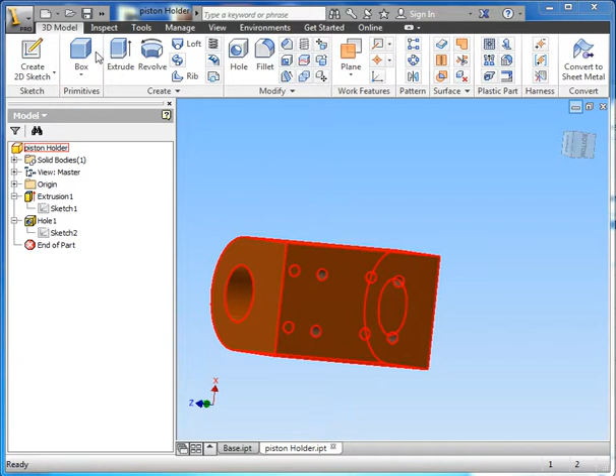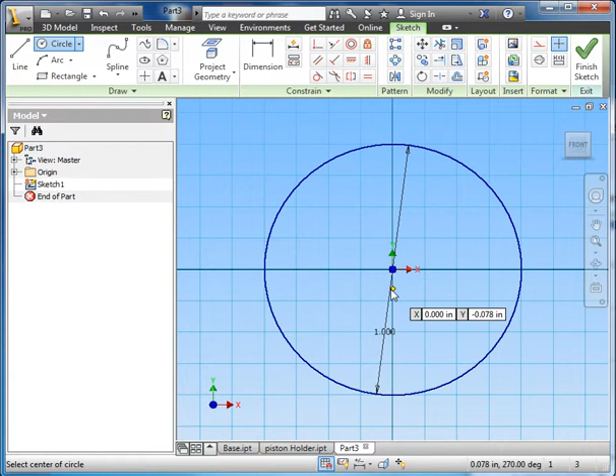Okay, in part 3 of this tutorial we're going to be making the anvil and the piston. So make sure your last file is saved, and we're going to go new, and again standard inch IPT. Open that up, and create new sketch, there we go, and let's create it on the front plane. Okay, so I'm going to use the circle tool, I'm going to draw a 1 inch circle, so I move this out, we're going to use dynamic input, so 1, enter, and there's our pre-dimensioned 1 inch circle.

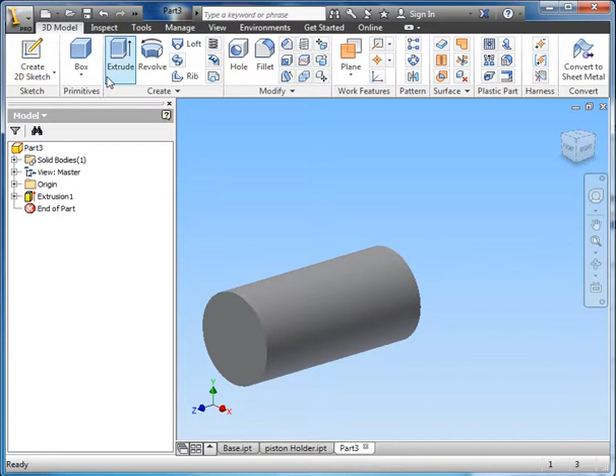Finish sketch, and now we're going to extrude that. Now for the anvil we can adjust this later, but let's extrude it a distance of 2 inches, and okay. So there's the start of our anvil. Now we need a wider piece on the back so it has a bit of a stop when it's going into the holder. So let's go create 2D sketch again on that face, another circle, and this time let's make this 1.5. There we go. So we've got a 1.5 circle. Finish sketch.

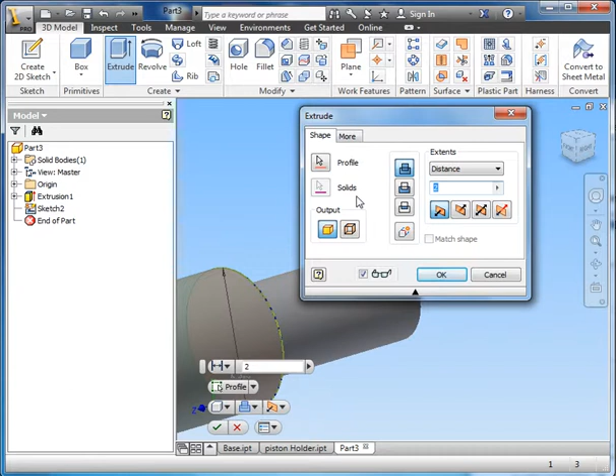We're going to extrude again. Select both profiles. And this time it doesn't need to be any more than a 1/4 inch. So there's our basic anvil. We can add a little bit of flair to that just to make it look a little nicer. So put a chamfer on there. And apply. Okay, so there we go. Let's change the color of this part so we know when we're doing our assembly that it's a separate part.

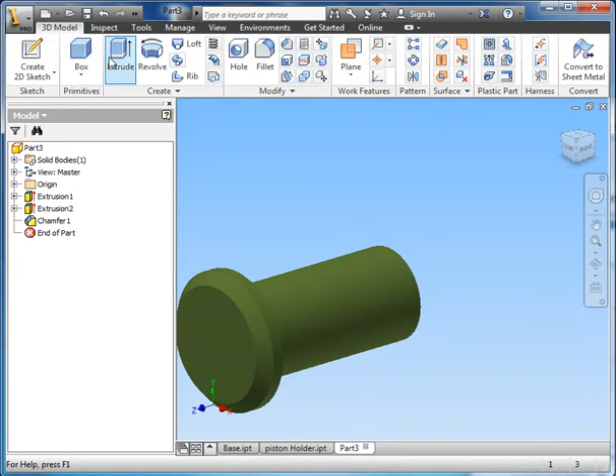And let's see, olive green today, and we're going to save that. So this part is going to be the anvil. There we go, save. So there's the anvil. We can close this, we don't need it anymore. Close that too, and that. Okay, so let's do another new part.

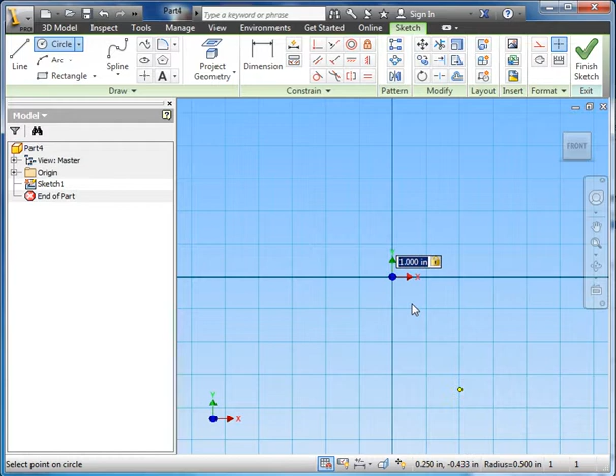Standard inch IPT, double click on that, create new sketch, we're going to create it on that plane, and use our circle tool, another 1 inch circle, dynamic input there, finish sketch, and we're going to extrude this circle. So we go extrude, click on the circle, and this one let's extrude to 5.5 inches. We may need to change this later, but for now that's okay. So there we go. Now we did draw it so the origins were in the middle, so let's click origin.

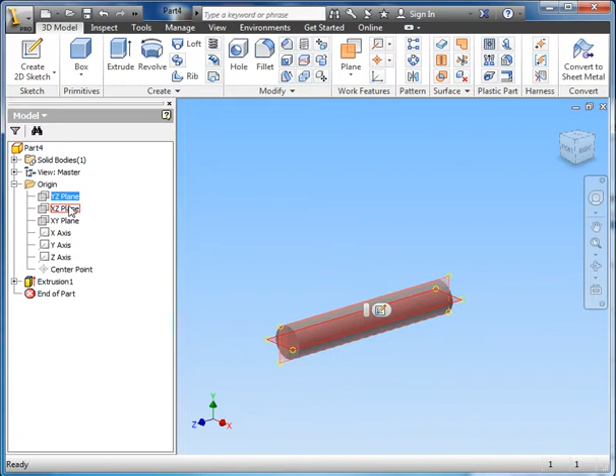And we can pick that one or that one or that one. Let's go there. I'm going to right click and turn on my visibility. So now I can see that middle plane. I'm going to create a new plane for drawing a little cutout on the back here. So plane, and I can click on that and drag it out. I want 1/4 inch. So I click yep. And you can see now I've got 2 planes there. Create 2D sketch on that new plane.

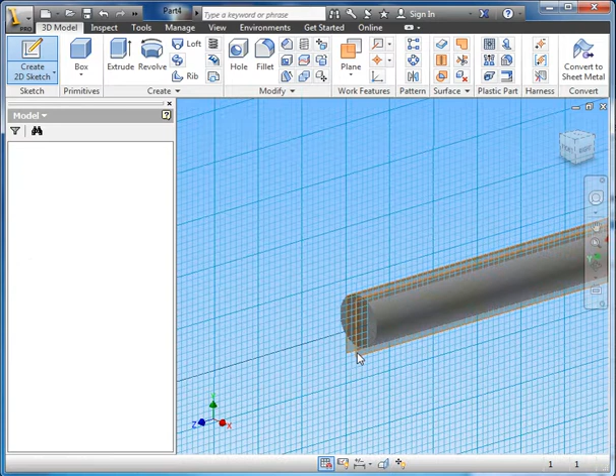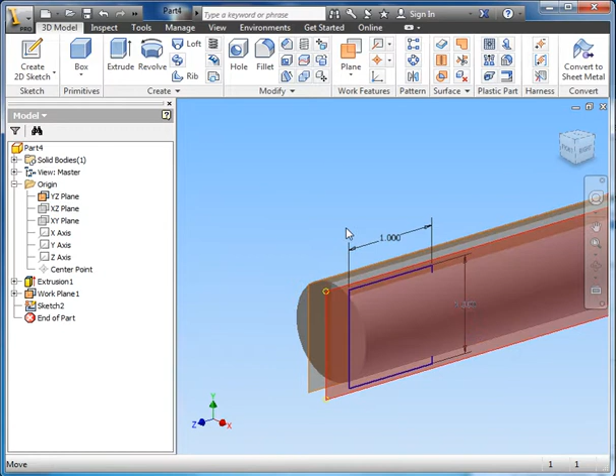We can project the geometry from the end so we know how big to draw. And we're just going to draw in a rectangle. Now this rectangle should go down about 1 inch. So we'll go 1, tab, 1 using that dynamic input, and finish sketch. So you can see there's my rectangle. We're going to extrude that rectangle and cut. So if this window doesn't show up, we can hide that. We can use cut down here as well, so either join or cut.

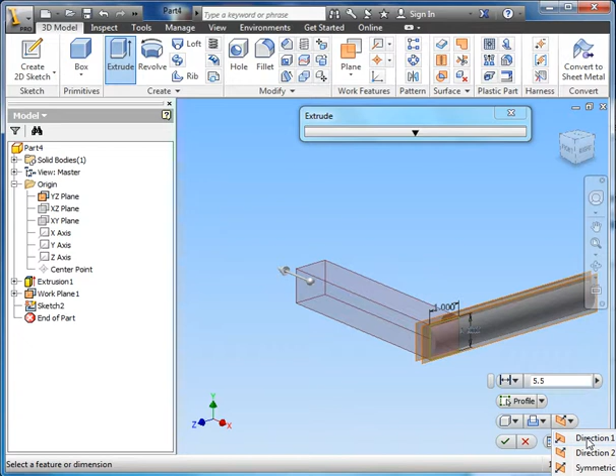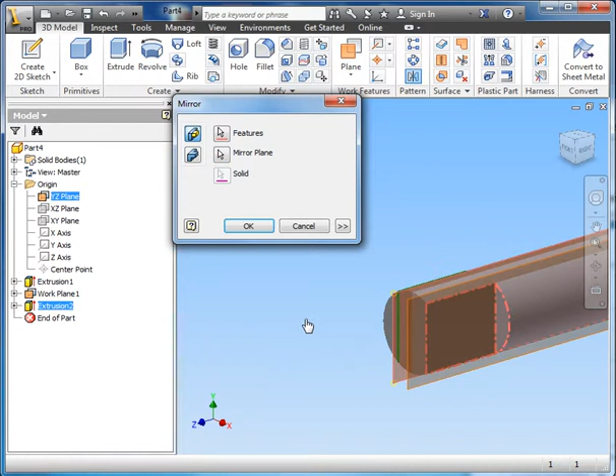Now we want to cut the opposite direction that it's cutting because we're just trying to remove a little piece of material. So let's change it to that direction. And distance wise we just want to go to all, but it doesn't really matter right now because it will just cut what we need it to cut. So you can see there's my cutout. Now I need to mirror this cutout to the other side. So I'm going to use my mirror command. I'm going to select that feature, mirror plane, use my origin plane as my mirror plane, and then OK. And you can see now that one cutout from one side got mirrored to the other.

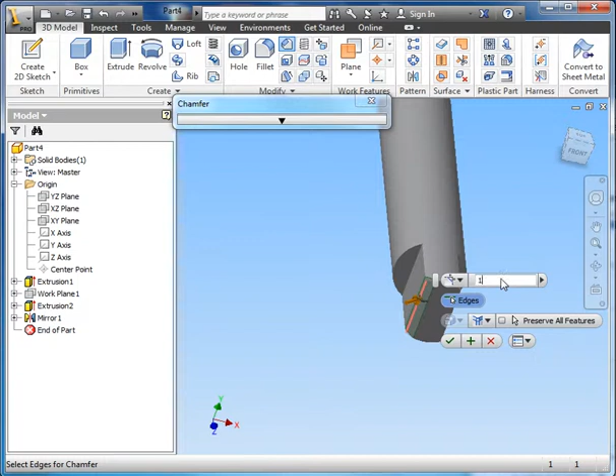So I don't need these work planes visible anymore, so I can right click, visibility, right click, visibility, and that clears that up. And again, if we wanted, we could add some filleting or some chamfers to this. So let's just do a little chamfer. That might even be a little big. Let's say 1/16, so 1/16 of an inch. There, we'll add there. And move it around, just make sure I get the right angle here. So there, it's all chamfered in nicely.

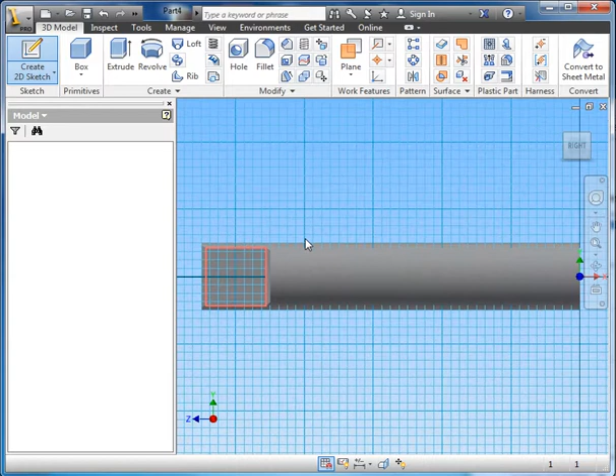That's good. Okay, and we need a hole in the middle. So we're going to start a new sketch. Now I should have put the chamfer on later, but that's okay. We'll just project the geometry so we have a good idea of what we're working with. And we'll add our point. So I want the point to be in the middle. General dimension, so this should be 1/2 inch from here to here, which it is. And we want it 1/2 inch from here to here, which it is.

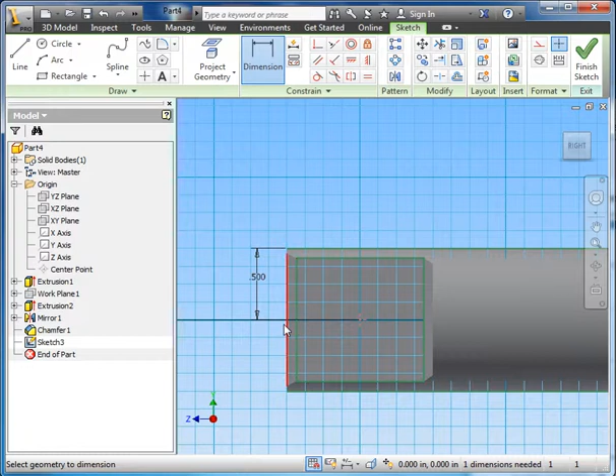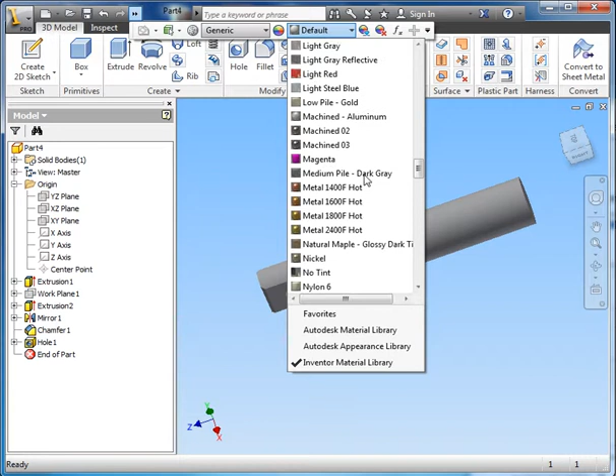Finish sketch, and we're going to make a hole 1/4 inch through. So 1/4 inch, distance all, and okay. So just simple little hole there. Let's change the color of the material. So up here, and something we haven't used yet, which I'm probably going to forget at this point. Let's say yellow. We haven't used yellow yet. Okay, let's save the part. And this is the piston. Save.